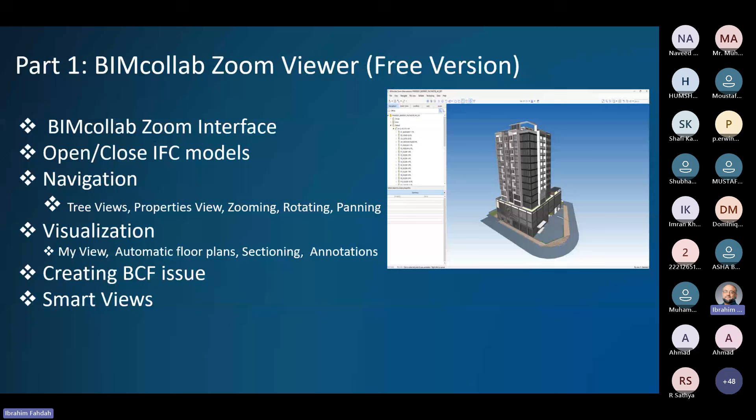The features we will cover today include the interface, how to open and close files, navigation, visualization, creating BCF issues (BIM Collaboration Format issues), and smart views, which are basically filters you create. This is the first part.

On the second part, we will build on the first, using the software to show a checklist of things required by Dubai Municipality when you submit, such as file naming, file structure, the schema, level naming, hosting, and information, all within BIMcollab ZOOM. This only covers the visual inspection. The requirements per Dubai Municipality also include data requirements, which some of you may already be familiar with through the QA/QC app you can download to check information. But today we'll focus on the geometry and visualization part.

If time allows, I will briefly talk about how to make the inspection more intuitive and easier. I developed a simple app that's quite useful. It takes your original IFC file, merges the QA/QC issues produced from the QA/QC app itself, and merges extra information to produce an enriched IFC file based on the original files. I'll try to show you how this speeds up the inspection process and makes it much easier. I hope time will allow me to cover this topic.

Enough said on the topic or the slide part. Let's move to the first part, talking about the BIMcollab Zoom main features.

I already installed the software. You can download the software, register, and then receive a key. Once you log in, you'll be using the free version by default. I think you're allowed to use the trial version for a month, but after that it becomes the free version. So this is the main interface.

Let me hide this bar if I can. Okay, the main interface is quite straightforward and simple. At the top you typically have the menu bar, and then the shortcuts for commands. The toolbars give you a shortcut for most of the commands on the menu. Then you have the navigation area to navigate the model, and in the middle here you have the 3D view of the model.

Let's try to open the sample file for today. What I prepared for demoing BIMcollab Zoom is a sample you can download from Build in Dubai. It's a sample prepared by Dubai Municipality for one of the sample models. So I downloaded the IFC file. You can also download the Revit file. After you download the file, you can just drag and drop to open the combined file.

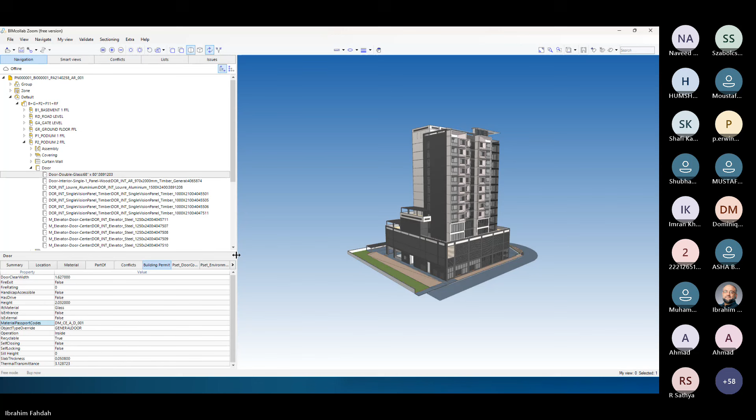You can choose the sets you want to investigate and read the properties under to inspect the information. Sometimes not all these sets can fit on the screen, so you have this button here to see or choose any other property set that isn't visible. So this is the left side - you can always expand if needed.

In the middle, as I said, you have the combined 3D view. This is a federated model combining the architecture and the structure. You can click the left mouse button and rotate around a point. You can zoom using the middle button on the mouse. If you click the middle button and keep pressing, you can pan the view. You can have perspective view or ortho mode.

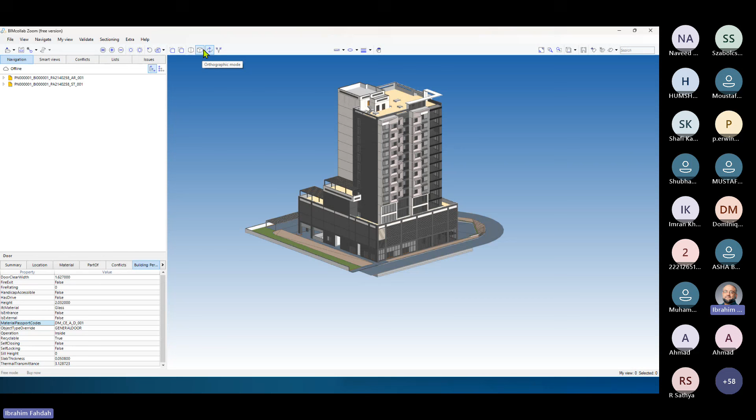We'll show you how ortho mode can be useful when you look at the 2D or elevation view. You can also zoom to extent - let's say you accidentally zoomed too far, you want to zoom back to fit, you can click zoom to fit. If you want to zoom to an area, you can select an area and zoom to area. If you have an element selected, you can zoom to that specific selected element or elements.

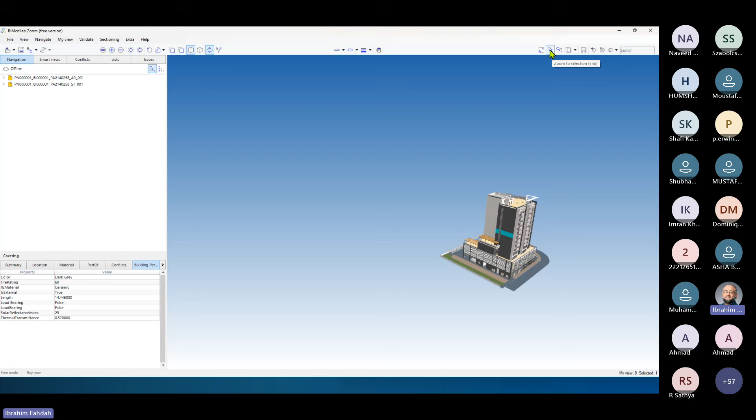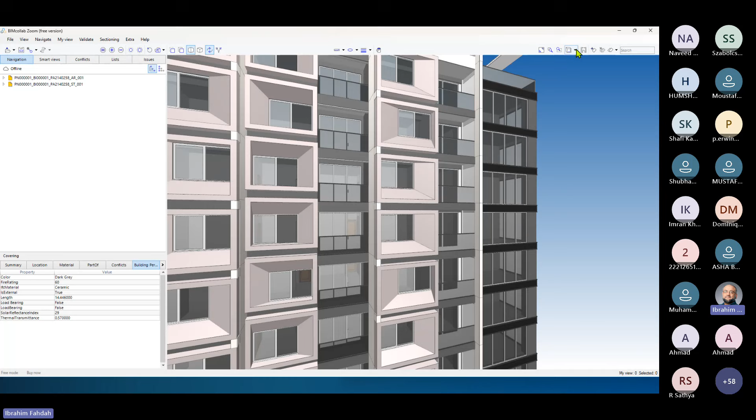You have here useful kinds of views - top, bottom, left, right, and so on - or taking a perpendicular view on an element. In that case, you can view it as elevation, especially if the orientation of the model isn't so great. This covers the navigation part of the software - the data is here, the model in the middle.

Let's now move to the visualization part, how to utilize the software to control what you see and apply action on what you see. I will tell you about a nice feature in the software. I don't know if it exists in other viewers. It's called My View, which basically is like a basket.

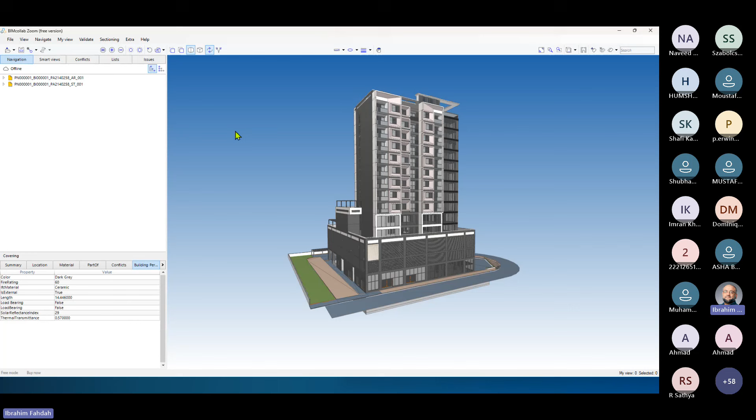You can put selected elements in it and they become stored in memory. This allows you to keep them there, apply actions to them, and restore them whenever needed. The My View menu is on the menu bar, but you also have shortcuts or buttons available on the toolbars. Now let's assume I need to take a specific story or level and make it my view, meaning filter it and store it in that basket I just mentioned.

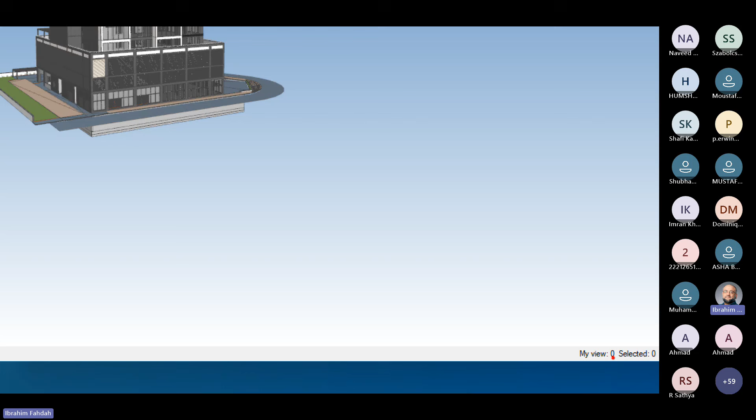Just before I show that, notice here in the bottom it says My View 0, meaning there is nothing in my basket yet. So it's empty. My View is empty.

Now, if I go to the hierarchy or the tree, I can make a selection. The selection, by the way, can be done any way you like. You can control on the keyboard, select some elements, or just select a floor. When you do your selection, you can just click on this button. It's called Set Selection as My View, which means take the selected element or selection, the current selection, and put it in that basket. So anything already in the basket will be thrown away, and this selection becomes the permanent or current selection.

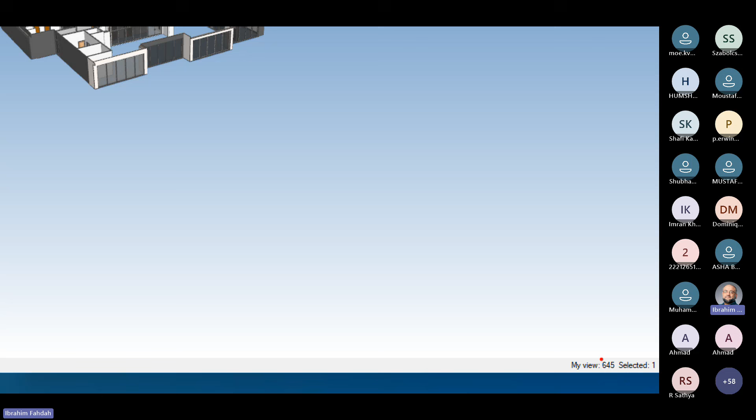So now every element under the story floor 2, or level 2, is selected, and you can see everything else is grayed out. That means it's the active selection. And if you look at the lower part here, you can see that I have 645 elements in my basket now, and this is the floor. In this case, it's floor level 2.

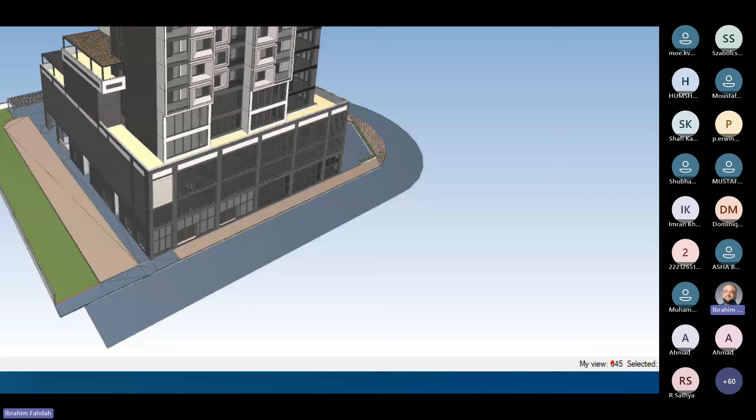If you restore the model, you can see the whole model back, but if you notice down there, I still have my selection in the memory. So I have it still preserved for me. How to restore it? I just click on this button, and then I restore my view. I will show you why this is quite useful and handy when you come to the visual inspection for permitting submission. It's quite a handy feature.

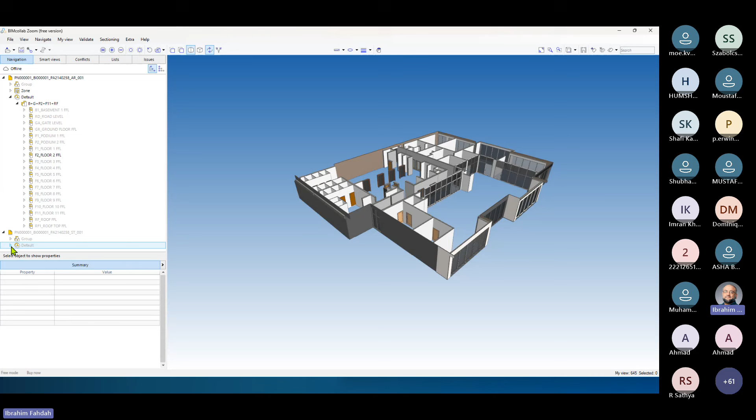Now, let's say you change your mind and need to add to My View. Instead of starting the process over again, you can just select the things you need to add to the basket. In this case, let's try to add the structural parts to the architectural view. I can click on Add Selection to My View, and now I've combined the architectural and structural model for level 2 in one basket, or one filter. And you see this My View number here has increased.

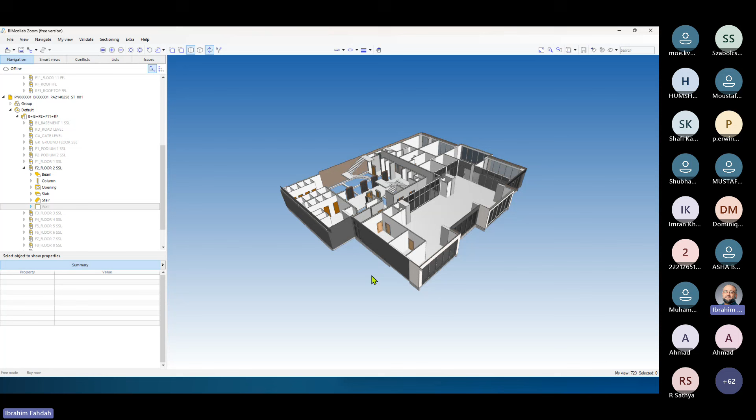You can always remove. If you change your mind and want to remove something, you can always click Remove. You don't have to remove the whole level back. In this case, you can choose to remove, let's say, walls from the basket. So now I remove the walls, and my view changes to become level 2 architectural and structural, except walls from the structural model. This is on My View. Let me add back the walls.

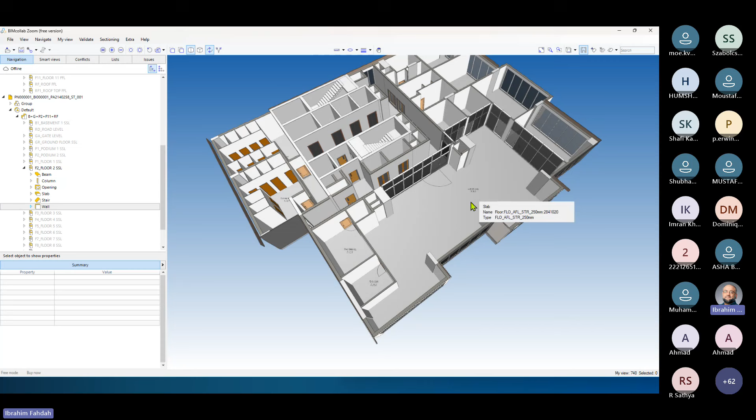And now we move to talk about the Auto Floor Plan. There is a nice feature, again, sometimes if you try to review your model not in 3D but 2D. The software has a feature called Automatic Floor Plan. If you click on it, it will automatically show you the space names on the projection of the 3D view.

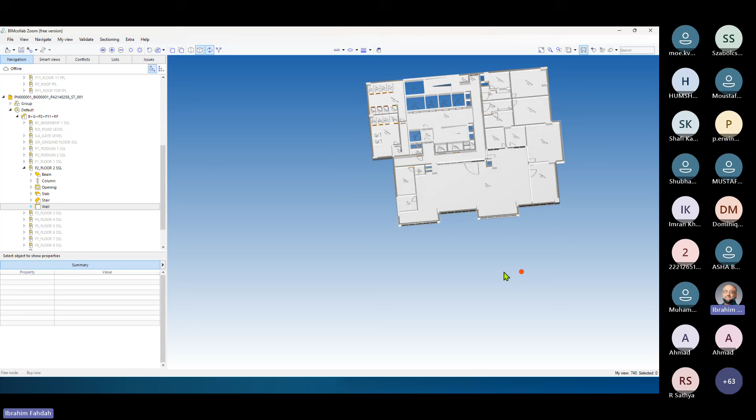So in this case, if I zoom in, I can make sense of what this space is for, and so on for the others. It's sometimes useful if you show it and then turn to ortho, and then you can have sort of a 2D view. By default,

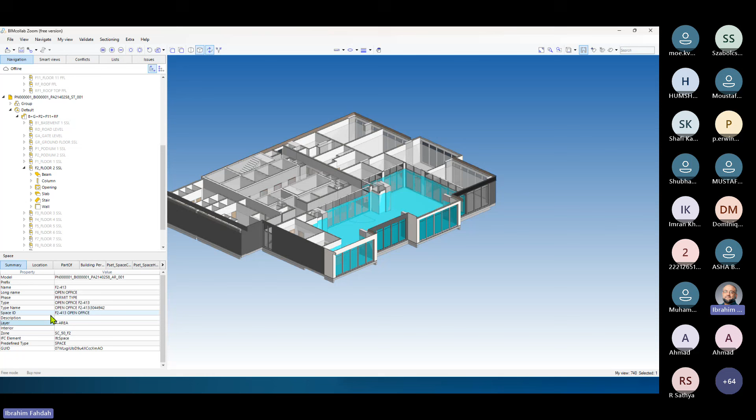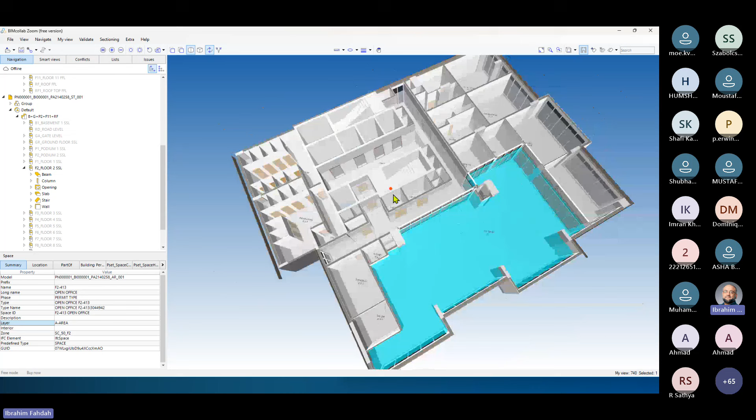You can always switch it off and toggle back on and off. I find this quite useful if you want to see the distribution of space usages on the floor. Sometimes also useful to see if you have any space missing. This is, again, when we talk about inspection later on, it's good for you to see when you export if you missed adding any space on any part of the floor.

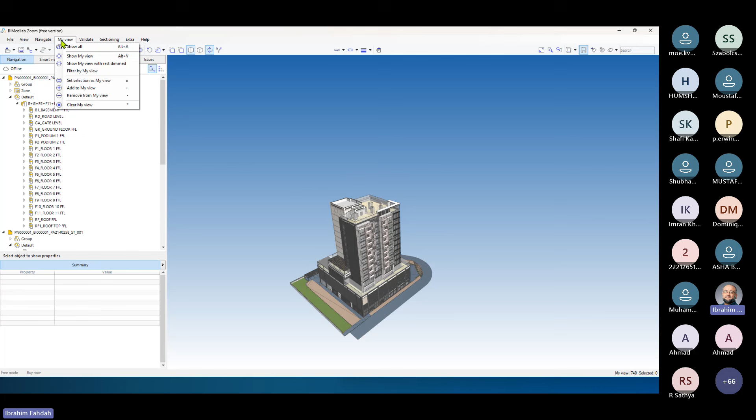Now let's restore back the view and clear my view. In this case, I came back to the initial state. So I don't have any my view, and restored everything back to the state where I opened the file.

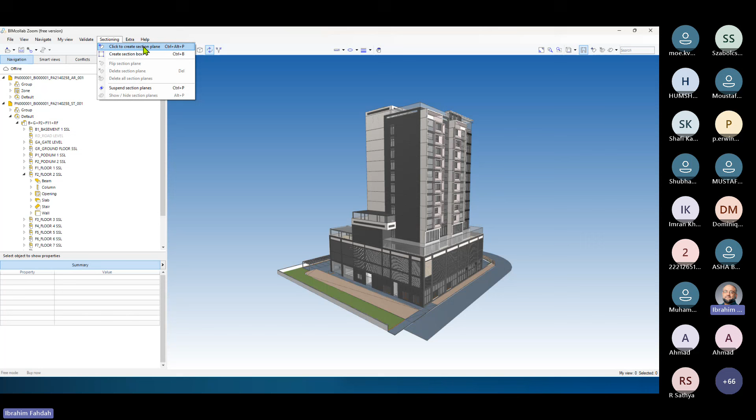Next is the sections. If you like to take sections in the building, sometimes this is useful if you want to inspect the model. You can use the sectioning menu. The quickest and easiest way is to create a section box. You can create individual sections if you like by clicking on create plane, but if you need a quick sectioning, you can click on create box, section box, and then you're presented with a box surrounding the whole building.

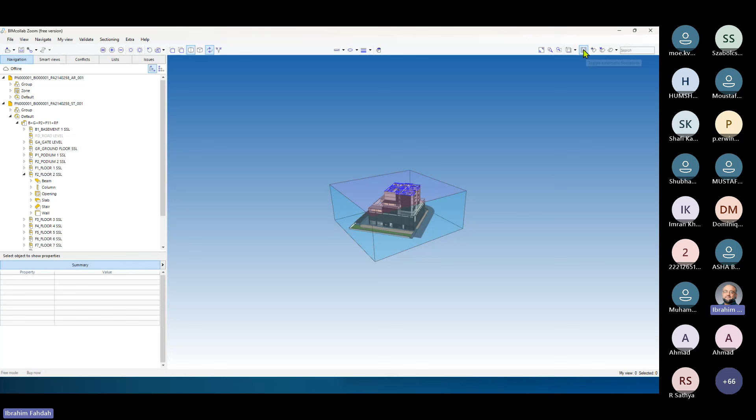If you click on any face, you see the color changed. Then if you drag that plane up and down, you can take a section. Let me turn the auto off so I don't see the projection. Now, if I take another plane, I took a section in the building from a different direction.

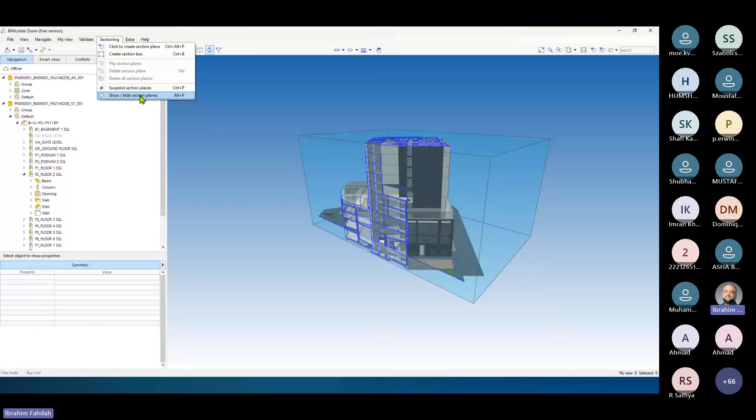Let's say you're satisfied with this as a section, but you want to hide the section box since it's obscuring the view for you, then you can just say hide section plane, and you have it without showing the box. If you want to toggle between the full view and the section view, you can suspend the section plane. This takes you back to the whole model, but the section arrangement you prepared is still preserved. You can always restore by clicking suspend section plane.

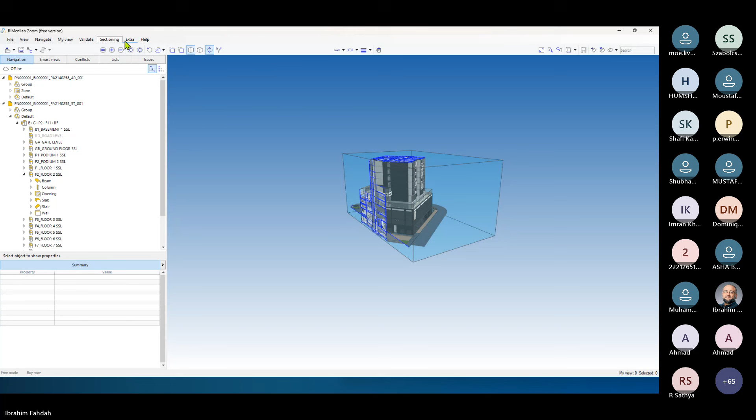On the sectioning, you might find it useful, as I said, in some cases. Now let's restore back to the whole model. We're still talking about visualization, in navigating the 3D view, seeing it from different angles and so on.

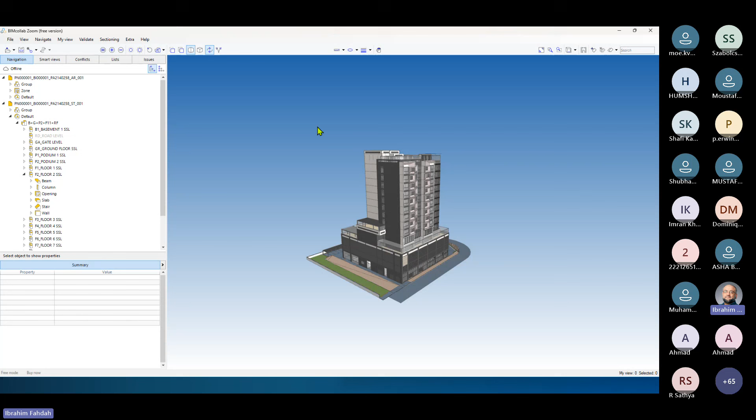Now, one thing sometimes needed in BIM 3D models is dimensioning. We always have this advantage in CAD, where you have details. In the 3D models, we don't have it by default, but luckily there are tools provided to measure or take measurement on the live model itself. You don't have to have it drawn by hand.

This is what I'm going to show next, the annotation, how to add annotation and take dimensioning on the model. One thing I should say here is that any dimension or annotation you add won't be saved in the IFC file. The IFC file will stay the same, it doesn't matter what you do with the model here. It's just a viewer, so annotation and dimensioning are temporary things you add to the model just to do the job you're trying to carry out.

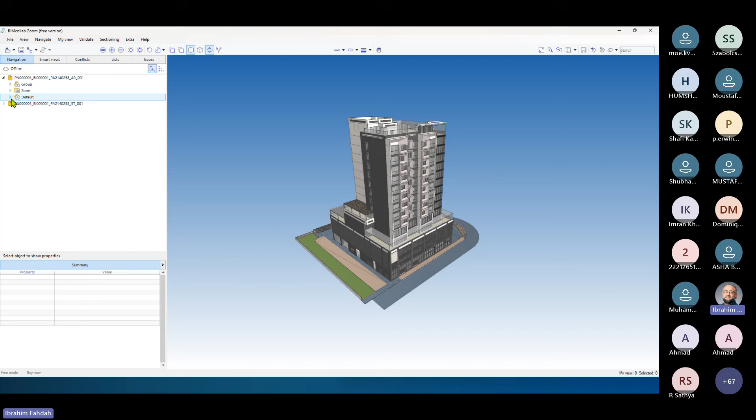Maybe instead of showing the annotation on the whole model, let's take a 2D view, set it as my view. Let's show the plan here, and let's hide the spaces for a better view. Let's say I'm looking at this, and I found a problem. I need to share it with someone, or maybe take screenshots, but I need to add some details.

I can use the annotation area or annotation commands. You can put a cloud. I'm not going to go through all of this because it's easy, meaning by playing with the software you can figure this out, but just to give you a head start. So let's say adding a cloud, you can add a cloud somewhere, you can change the color, you can change the thickness of the font.

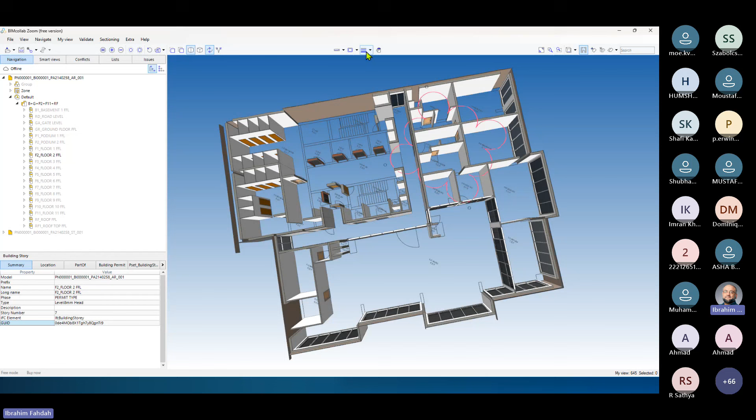Next, you can add a text if you want. So you can say 'issue here.' Of course, I think in this case, if I oriented the level as a projection, it would be seen as 2D, so there's no problem with that. You can change the size, you can move it, and you add so on.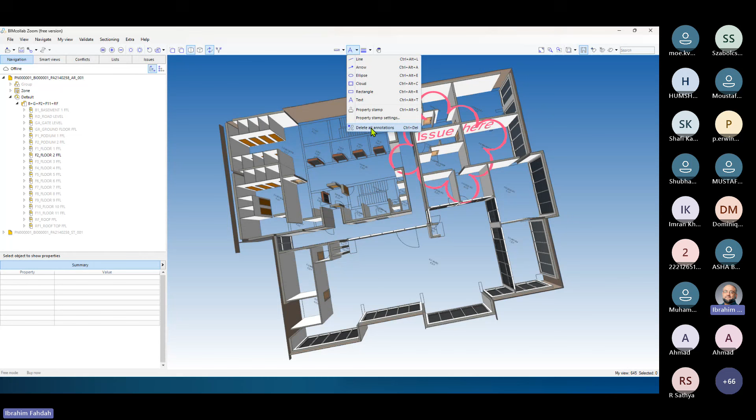You can carry on adding annotation, but just be aware that once you restore or delete the annotation, everything you did will be gone. It's not preserved like my view or other features in the software, where you can preserve the selection. Here, if you delete it, it's gone, or if you restore, these are also gone. This is for the annotation. As I said, there's plenty of options to try on your own.

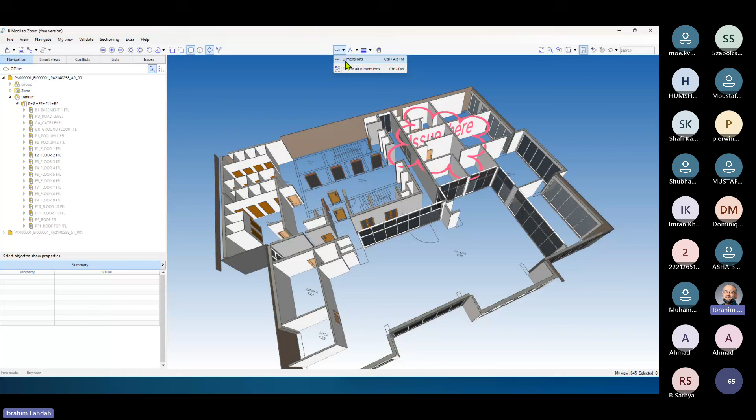For dimensioning, you have this simple, really quite simple, straightforward menu.

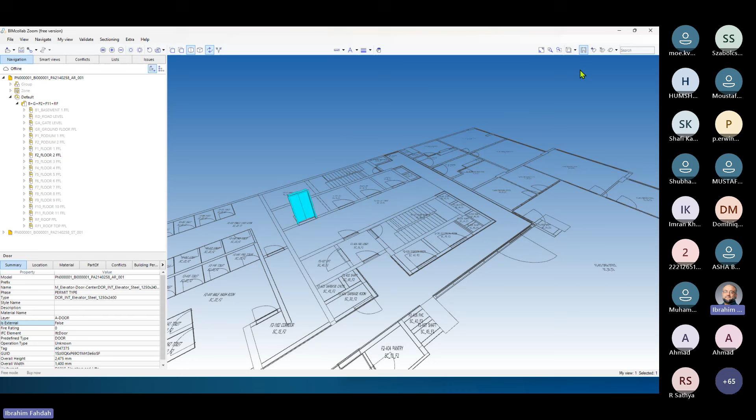To demo the dimension features, it's best to select a simple element and zoom to it so it's clearer. I'll select this door and make it my view. Let's delete the annotation and hide the auto plan, so it's quite simple now, like this.

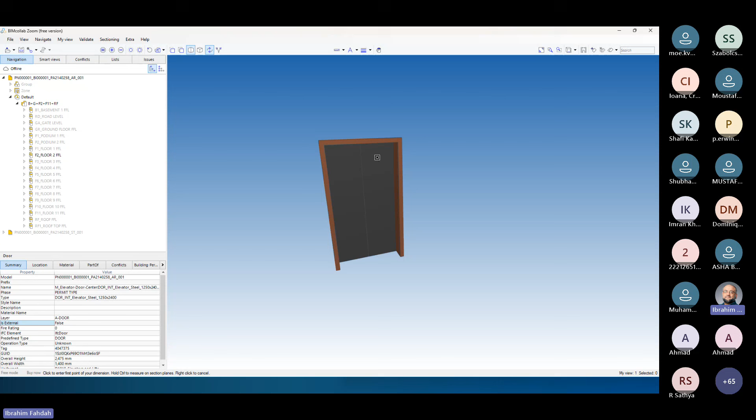For dimensioning, you start the action by clicking on dimension, and then you have this icon waiting for selection. As I zoom in, if you see this square, that indicates I'm selecting a plane. If you see a line with this red highlight, I'm selecting an edge. If you hover over a corner and see an X, that means I'm starting my dimensioning from a point. So you have three options: starting from a plane, from an edge, or from a point.

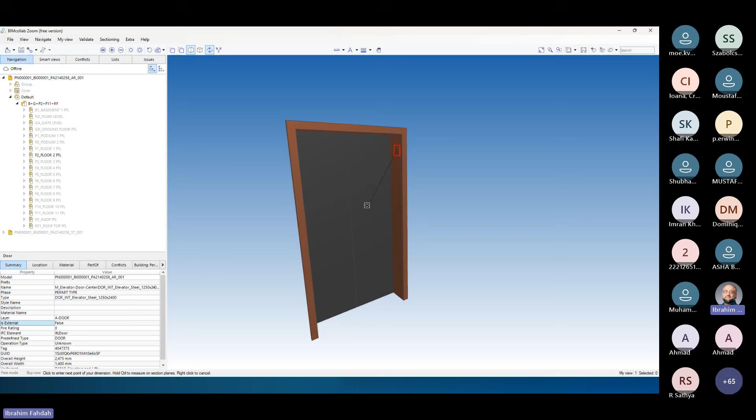Let's say I start from this plane to this plane. Made the selection and added the dimension. So in this case, I selected from a plane or a face to another face.

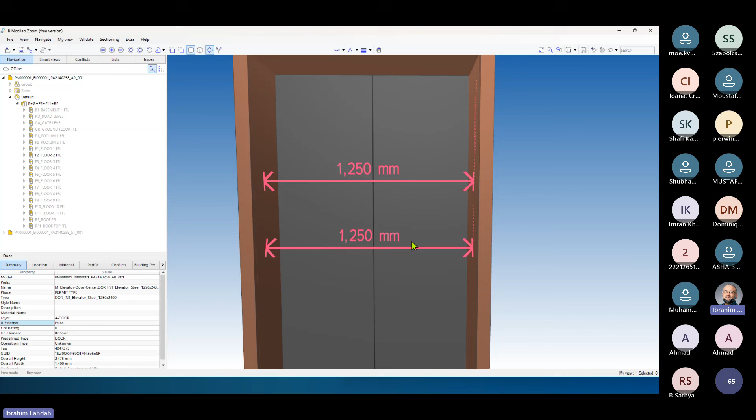You may wonder why it shows as perpendicular, even though I chose from a point to, let's say, a point here, but it keeps it as perpendicular. That's the default behavior. By default, even if you make a selection between two points, you always have the default distance measured as perpendicular on the faces. You can force it to go from the point to the point you selected by clicking shift on the keyboard.

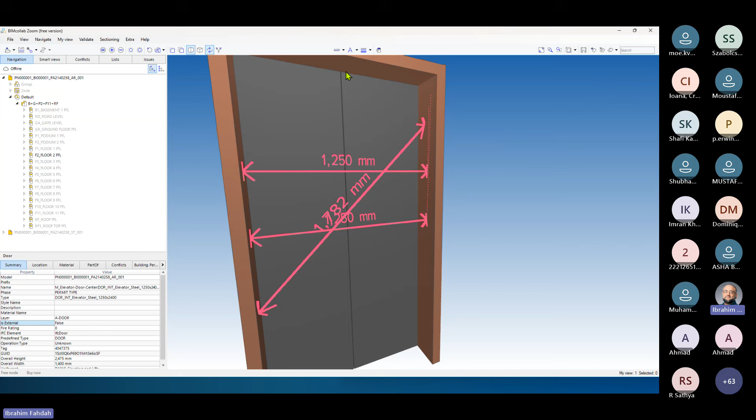Let's rotate. In this case, we're just telling the software to obey my selection, my point selection from the two points I selected. You can select from a point to edge, edge to point, or a combination between the start and the end. You don't have to start face to face, it could be face to point and so on.

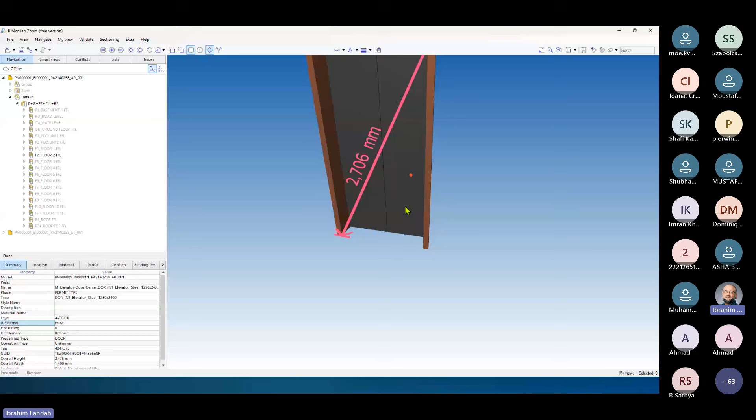Let's try from point to point, from this point to this point down there. So again, you see the measurement added. You can add measurements for different reasons, then take screenshots if needed. Or in some cases, after you create this, you can export these issues, which is the next topic, related to taking dimensioning and adding annotation.

Typically, we use dimensioning and annotation to highlight issues in the model. So let's say you add a dimension or annotation showing some problem, for example, the dimension of this door is not correct, or it's a narrow door, whatever. You need to share this with the modeling team or another discipline. If it's something quick, you can take a screenshot and send it in an email or put it in the system as a ticket, whatever system you're using.

But if we stay in the theme of using OpenBIM, as you may know, there is IFC, which is for storing the model. But you also have other open standards like IDS and BCF. BCF is BIM Collaboration Format, and basically it allows different parties to exchange issues in the model in a standard way.

Luckily, BIMcollab ZOOM supports this in the free version by default, and it's accessible from the issues menu. Once you set up your view and are ready to create the issue, you just switch to issues and create an issue.

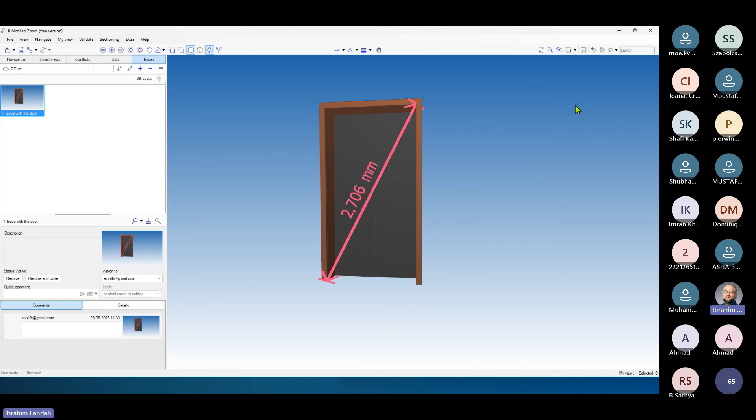Last thing on BIMcollab ZOOM is a nice feature which I like: smart views. Basically, they are filters based on certain rules you define, but what's good is that you can save them locally on your disk and reuse them in any other models. They are not only for this model.

Under smart views, the software comes with default samples. You can review them and see how they were created. Basically, as I said, they are filter storing rules to filter the model. It's stored locally, and you can share with your colleagues if you want and apply them to any other model you open in the future.

Let's go for one of the examples that comes with the software: fire rating classification. If you click on it, this pre-built filter will automatically color the model based on the fire rating. If I zoom here, you see those are the ratings. So it scanned the whole model, found those elements that have a fire rating attribute or property, grouped them based on the value, and gave them an auto color.

If I edit this, you can always edit this smart view from the right click, and you'll see what rules are defined to create this smart view. In this case, it's quite straightforward: it says any element that has a fire rating attribute, I want you to add it to the model, I mean to the 3D view here.

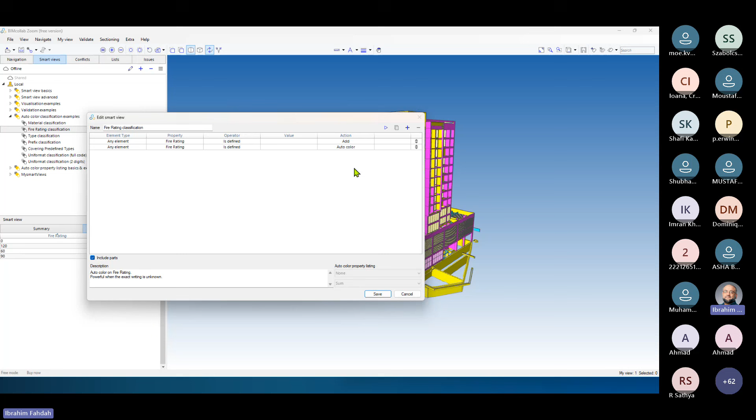When you have this, if you are in testing mode, you click on this button and it will execute the command. You can explore other smart views here to learn what they do.

One thing also useful, as I said, is that using my view is quite handy. In this case I applied my view by clicking on it. Let's restore and show you what I mean. If I click again, it applies on the whole model. Or you can go the long way, right click and click show. It will do it the same way.

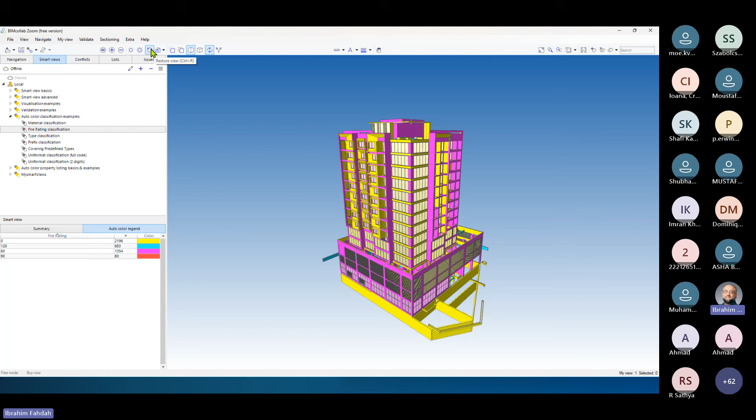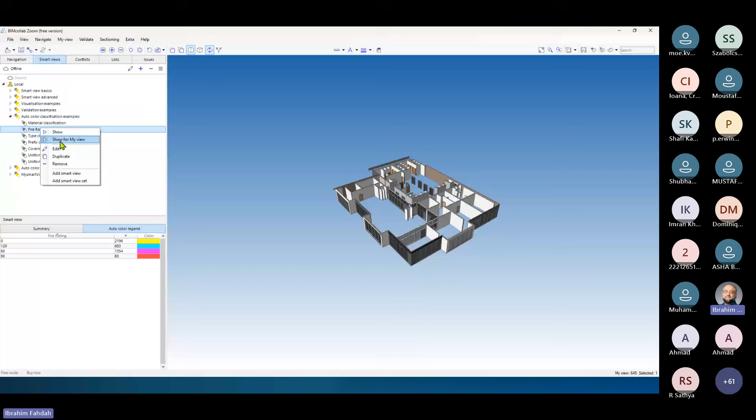There is a feature to apply smart views on my view, not on the whole model. This comes in handy especially if you're examining part of the model, not the whole model. To do it, you just select my view and define it. In this case I selected level 2. Once you have it, simply right-click on the view, go to smart view, and choose show or execute for my view. In this case it executed the filter or rules only on the selected elements under my view.

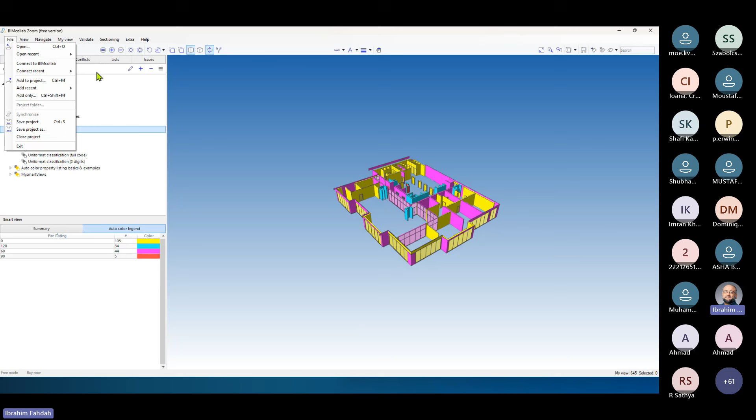This is again quite useful when we talk about inspection for DM, Dubai Municipality. This is the first part. We took a bit of time on that, but I hope now when we move to the second part, things become easier or clearer for you to follow along. I will restore the view back, clear my view, and that's the end of the first part.

If we go back to the demo, now we'll move to the second part, covering the inspection, visual inspection for the IFC file for DM submission. Hopefully now you'll follow easily, because I will just repeat what I said in the context of submitting to Dubai Municipality. I will not add any new knowledge or features beyond what's already explained on BIMcollab ZOOM. I'm just showing you how to use them in the context of submission to Dubai Municipality.

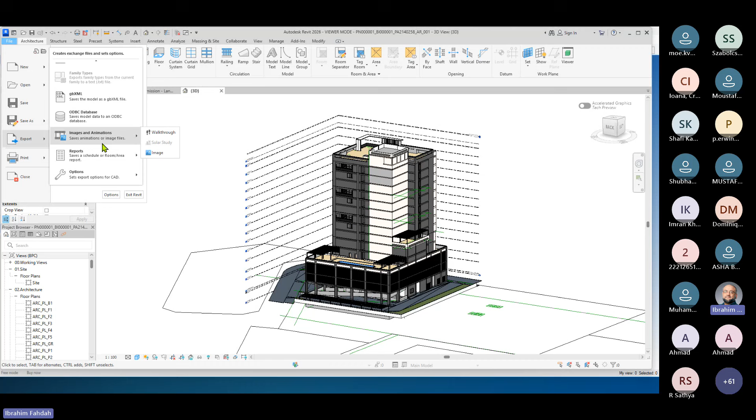I have the viewer here. I don't have the full version, so I'm in viewer mode, but you know what I mean: going to the IFC export, choosing the settings, following the guidelines by Dubai Municipality by providing the correct property set mapping files, and you'll be ready to export. Once you export, you should end up with 2 files, one for the architectural, one for the structural.

The first thing is to give the files names as per the standard. In this case, I followed the standard, or the sample you already downloaded following the standard. Once you have that, you are ready to go back to BIMcollab ZOOM, assuming now you became a user of the software. As I showed earlier, you know how to use it, navigate the model, drag and drop the file, and open them.

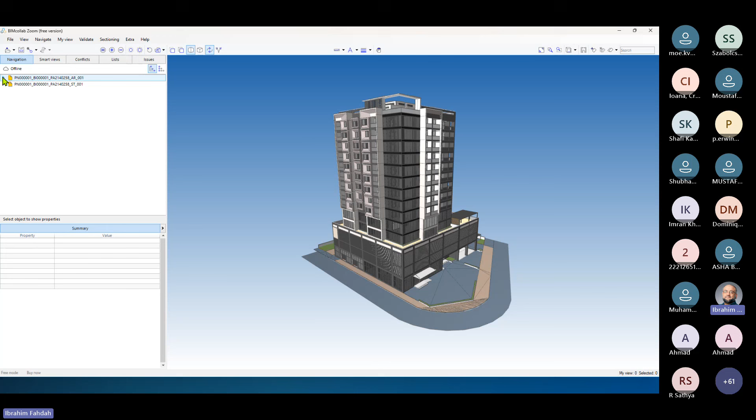First thing to check - I'm assuming I'm doing pre-flight checking on my BIM model before I upload to the Dubai Municipality platform. This is an offline check.

So first thing I check is that I have the hierarchy correct. I have the project, I have the site here, I have the building, and I have the levels. One thing I noticed before when I was at the municipality is that sometimes you end up with 2 sites - some people export the model with 2 sites. You should have exactly this hierarchy: project, 1 site, 1 building, and under that you have the floors or the levels.

Once you check the hierarchy for each file, you need to check the levels. Make sure that you only export the levels required by DM. Sometimes in the Revit model you could have extra levels, reference levels you need in your model. You can leave those unexported by unticking the export option. This way you only export the levels that are required, and the exporter will ignore the levels you untick or forcefully choose not to export.

Now the levels should be in the right order - you have the basement first, then road level, gate, and then the ground, and then subsequently all the following up levels. What's important is to make sure the level prefix is correct. Anything that comes after can be tolerated, but the level prefix is very important.

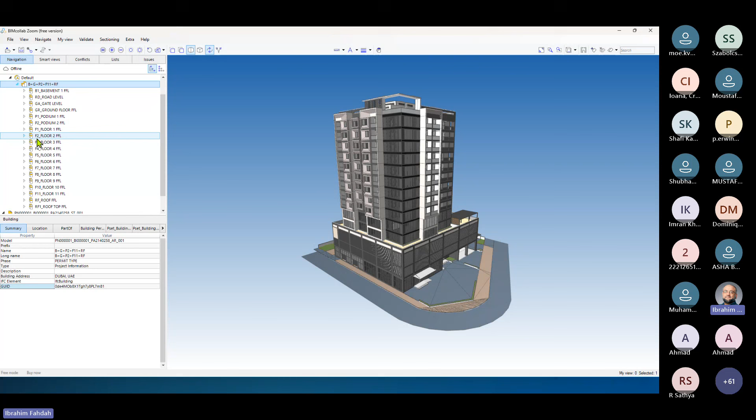Next is checking the schema. You need to check that you export the IFC files using the IFC4 schema. Any other schema is currently not recommended by DM, so you need to make sure it's IFC4, and not just for one file - you need to check that every file has the right schema or the same schema. It cannot be a different schema, that will be an issue.

After that, especially if you have large IFC files - if you go to the file and zip them, and you find the file is larger than 150, especially if you have a small or medium model, that indicates you accidentally exported a lot of unneeded elements. We call them proxy elements.

To check if you accidentally did this, you can come to the viewer here and switch to the type tree. This is a handy way to quickly see if you accidentally exported elements as proxy elements. For example, the kitchen sink, the toilet, the chair, or the tree - all of these elements are not needed when you export to the IFC requirement for BIM submission in Dubai Municipality. So if you see proxy elements here, especially a lot of them, you can quickly filter them and see how many there are.

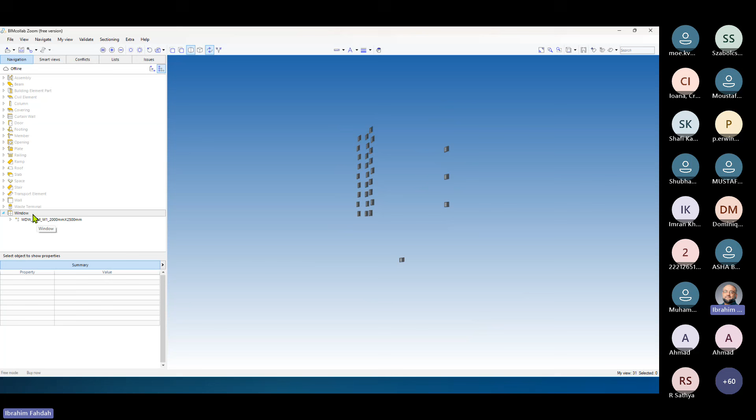In this case I'm just using the windows as an example, but let's say proxy elements - if you have a lot of them and see they're things that should not be exported, then go back to the Revit model and make sure you follow the guidelines set by Dubai Municipality. If you follow that guideline, you'll certainly be fine not exporting those extra elements, which leads to a smaller file size and less processing time when you upload to Dubai Municipality.

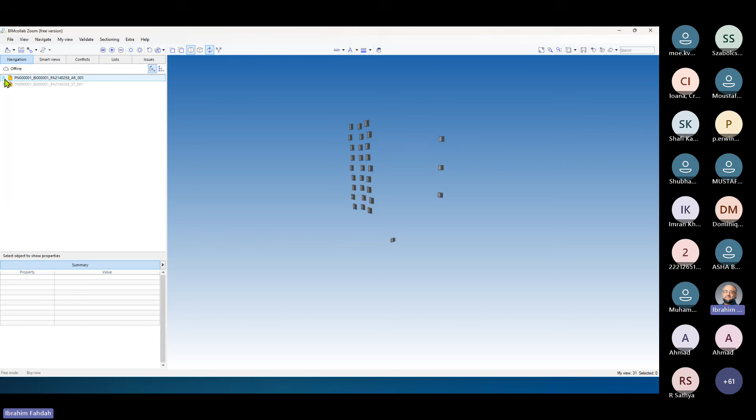Other things you can check: geolocation. If you select the site and go to location, if you see this kind of coordinate, it indicates that the location is set in Dubai, and most likely you have the geolocation set up correctly. But for a 100% check on the geolocation, it's best if you upload the model to the Dubai Municipality online platform and check that it's within the parcel boundary. The offline check, as you see on the screen, is just an indication that your geolocation setup in the Revit model is okay.

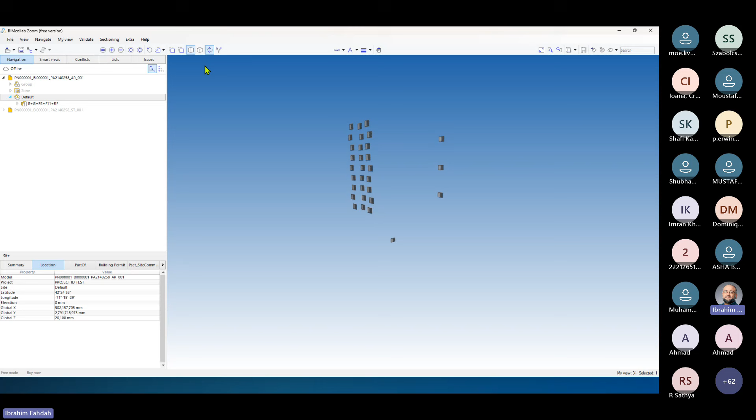Now if we move to the visual part - let's say you exported a model, you need to make sure it's visually correct, that you don't have any extra flying objects. It happens sometimes, especially with bad modeling, where you have flying objects everywhere. So just make sure it's a decent 3D view that represents the correct visualization.

Then you need to check that hosting of the elements is at the correct level. What I mean is you shouldn't have an element on the second floor hosted in the third floor, or using different levels for hosting. Another thing is for elements like walls and columns, they should not be carried from bottom to top, they have to be split in their own levels. The only exception might be cladding, which can be tolerated by the team reviewing the BIM model, but for everything else, like walls and columns, they should be split per their own level.

So how to check the hosting? You have two options. If you submit many models to the municipality, you can create smart views and filter floor by floor, so a smart view for floor 1, 2, and 3, and then execute them to filter those floors one by one and check them.

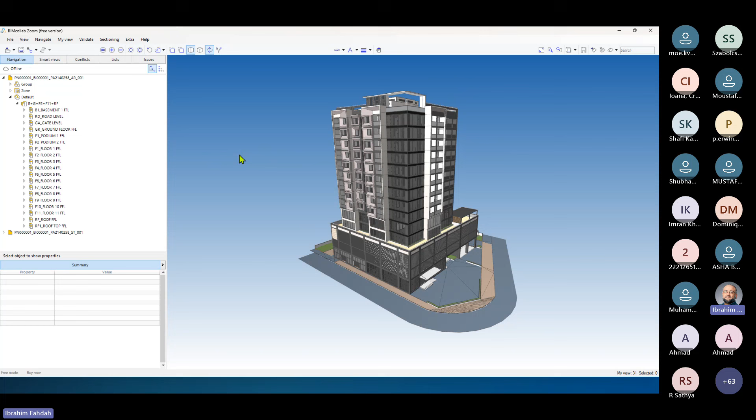But let's say you occasionally submit to Dubai Municipality. The easiest way is just selecting the levels and setting it as my view. And in this case, if I add the structural model, you can see all the elements are hosted in their levels. Nothing is flying up above or below, and the walls and columns are split per level. So that's the correct setup.

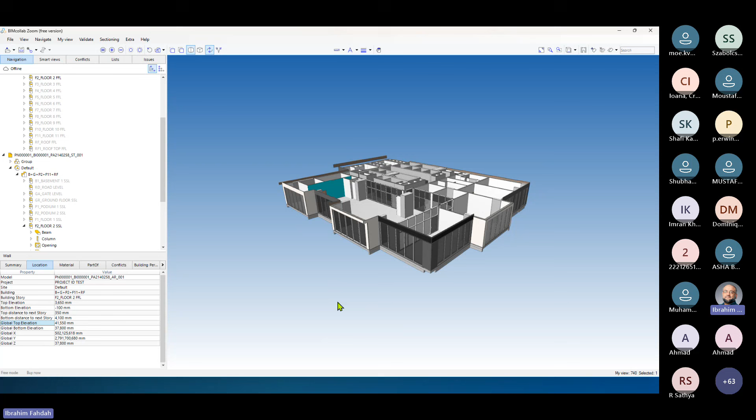Once you see a wall that's up or down, you need to go back to the Revit model and correct that. Or if you see walls going all the way from the ground to the top story, that's also an indication something is wrong with the hosting. So if I choose another one, let's jump between them. See, it's all looking nice. So this is the visual checking on the 3D whole model, filtering one by one to make sure the hosting is correct.

The last thing is the information. So now we're pretty much okay with the inspection. You're confident you've covered everything: the hierarchy, the level naming, the level order, the correctly exported levels, the geolocation, and the hosting being okay per level. At this point, you are okay to stop here.

You don't need to inspect the information, because for that you can use the app from Dubai Municipality called QAQC, which generates this kind of Excel sheet. So now we talk about information inspection. That will be covered some other time, but just to quickly say, for the information you can use the QAQC app that produces all the issues in the model.

One thing useful, or the viewer useful, is if you want to see visually where the problem is in the model that's reported in the Excel sheet. So if it doesn't let me... okay, let me try again. I have this file, the QAQC file generated for the same model, and it has critical issues. For some reason I cannot see it, let me try again. Let me shut it down and open it again.

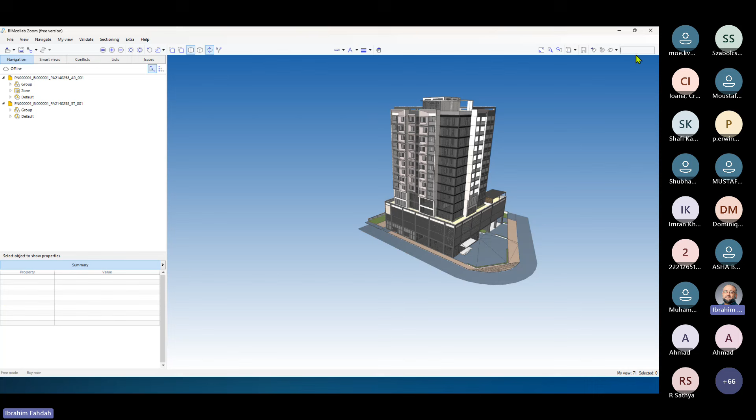It just doesn't let me, the mouse is not responding. The file will be generated if you use the QAQC app. Okay, now I can make a selection. One thing useful sometimes, it doesn't let me again. Let me try. Okay, I will try it here now. So if you select the ID of the element, you copy it, so you can visually find this element and see where it's located in the building.

In this case, I think we need to switch the spaces on to see it. So those are the elements that have the problem. Sometimes, if you know the ID from the QAQC results, you can come to BIMcollab ZOOM, paste the ID here, and then find the exact space causing the problem and inspect the model or the information of that element to make sure what's going on.

So you go through the building permit—maybe I should have said, this building permit is a custom property set provided by the settings. When you export from Revit, many of these property sets are standard, especially the ones starting with Pset, or the Qto one. But if you see building permit, that means you correctly exported the model.

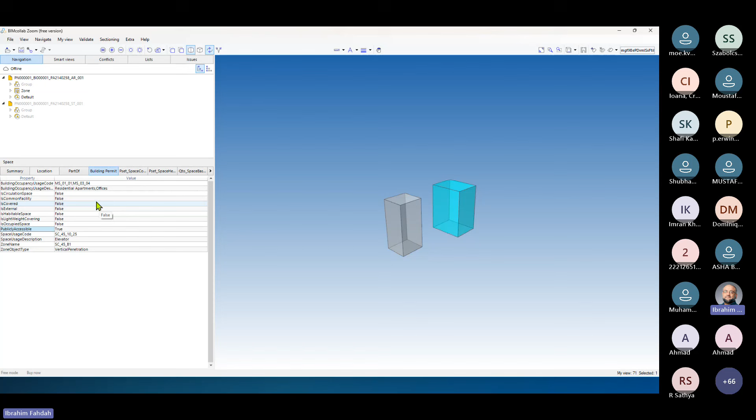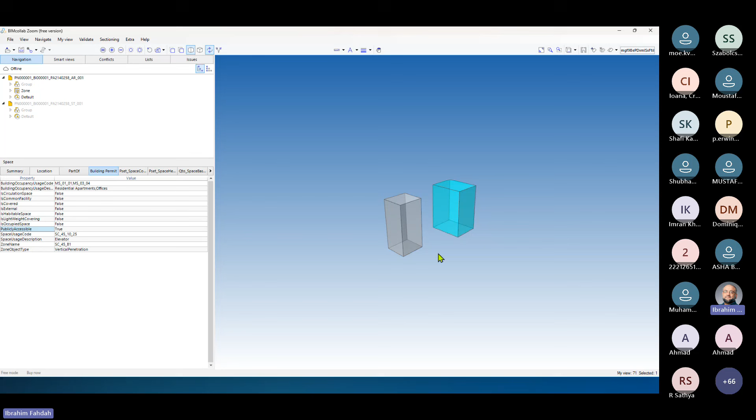But if you want to inspect the information in case you have critical issues, you can copy the ID from the report here into the interface and see it visually. So as I said, usually most of the time you don't need this unless you fail to resolve the issue in the Excel sheet by identifying the object directly in the Revit model. So this is the other part, visual inspection of the models using BIMcollab ZOOM.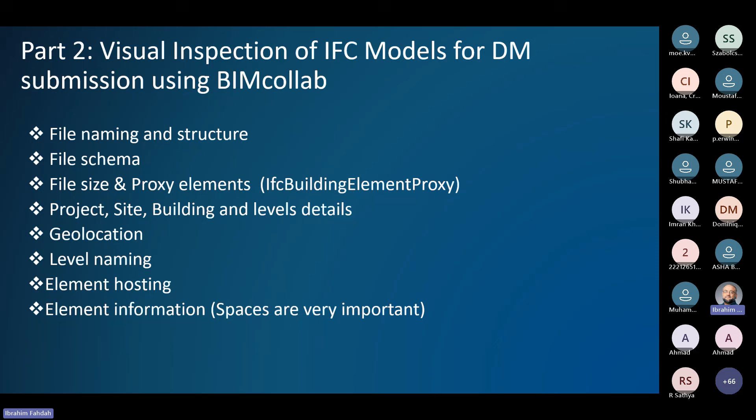These are the main points. Time doesn't allow going in depth for everything, unfortunately, so we'll stop on this point and quickly show you the enriched model. I have them already created, let me navigate to them.

As I said, there is an app I developed where it takes the original model and bakes into it the QA/QC results and the checking and everything you need to do a full visual inspection in one place. In this case, if I select one of the spaces, you can see here an added property set by the application.

It created extra property sets and extra attributes and properties from the original model. So there's nothing added externally, it's all from aggregated data.

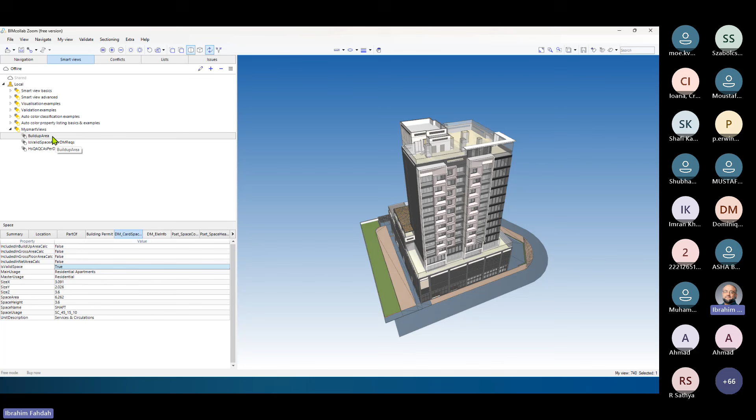This helps because I have some smart views created based on those generated extra attributes, so quickly I can see which spaces in the model have issues. If I click here, all the models in the building are green, meaning all the information is provided. If I click on any space that has issues, I quickly find which space or spaces are in red.

Those are incomplete or have some critical issues. If I select any of these spaces, I go to the enhanced property set called QA/QC. It copies or includes the same issues that are in the Excel sheet. So the enhancement took all those issues and baked them into the IFC file to generate enriched, easy-to-review models.

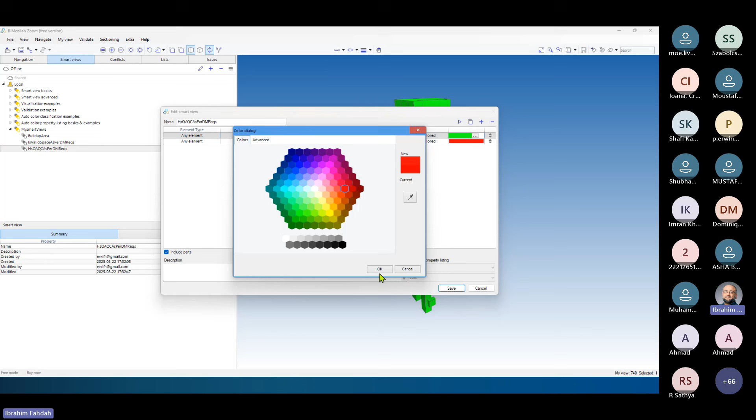This smart view is quite straightforward. For any element, if it has any critical issues... actually maybe it should be the other way around, but if it has an issue it should be red, and if there's no critical issue it should be green. Let me switch them this way, that's the correct way. Now if I execute, that's the right way to see it. And as I said, these attributes are created from the original model.

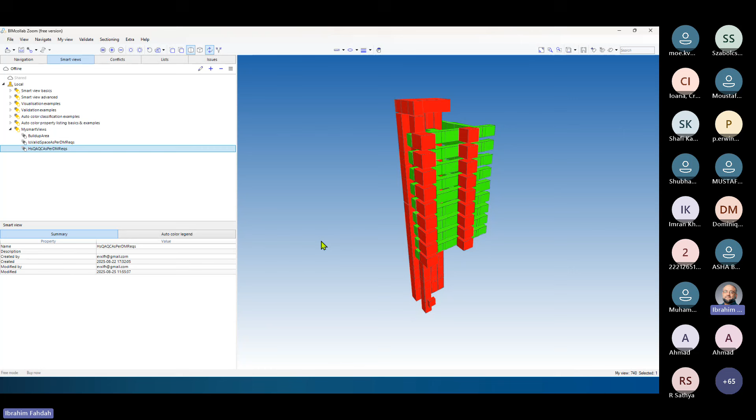The app is not available on Dubai Municipality, it's just something I worked on to make review submission for permit applicants easier. If you're interested, you can reach out to discuss this. But again, you don't need this - as I showed in the second part, you can use the free version of BIMcollab ZOOM with the original file to do confidence checks on your BIM model without any extra tools. It might take extra time, but beyond that you'll be fine.